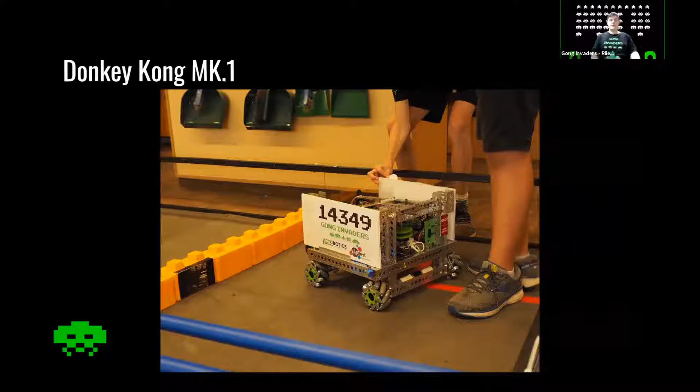Our FTC rookie season was Skystone, but we have participated in 2 seasons of FLL as a team and even more as separate teams. Our robot, named Donkey Kong, was our first robot using mecanum wheels. We have a 4-wheel mecanum drive which allows driving in all directions.

Our arm developed over the season and we finished with a continuous lifter, although this was never used in the competition as it was our project for World Championships. Our arm during the competition was an angle lifter with cascading rail extension.

For our regional competition, we arrived on day 1 with a great robot and a confident attitude. We tested on the practice field and everything worked well. We got to our first game and the autonomous worked perfectly. When we went into teleop, however, the robot stopped moving and we couldn't do anything.

After the game, we tried to test the programming at the practice field and it worked fine. When we had our next game, the same issue happened. Perfect auto, no teleop. We then started to investigate our code more deeply.

We couldn't find any issues, so we asked some other teams. No one could figure out why the robot wasn't working, even after we had talked to multiple different teams. That day, in all 4 of our matches, our auto worked, but our teleop completely failed. We even won one of these games as our autonomous was high scoring, but we still felt very demoralized as our robot wasn't working the way we expected it to.

During this day, we approached many teams and made new connections, but we were all disappointed in our results. That night, we rewrote our code completely, and in the morning, we were lucky enough to be given a fill-in position in a game with only 3 players, which gave us a chance to test our code in match conditions.

The countdown to teleop was extremely intense, but when the timer ticked over, our robot had moved, and we had our code working. Our team, family, and the whole crowd cheered, as everyone knew our struggles from the previous day. We were filled with joy and were ready for the rest of the comp.

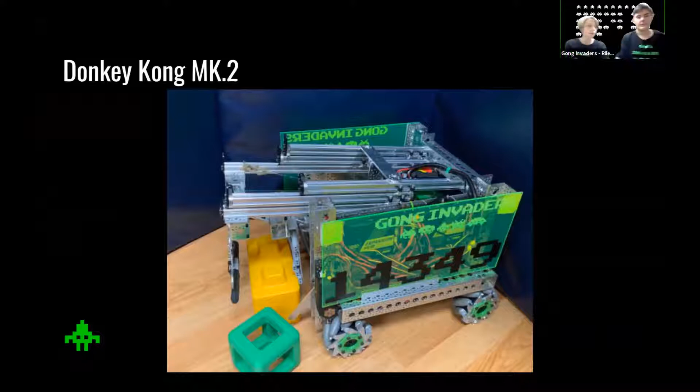After a strange experience at regionals, we were ready to come back strong and perform very well. Before we competed, we talked to another team to get help with our code, to see if it was working properly. The mentor came and gave us some tips, which addressed the same issue we had at regionals. We were very thankful for this, and glad to finally have our problem solved.

After this, we continued the competition with our heads held high, and our robot performed extremely well. We won all 4 of the games that day. This placed us in first place for the whole day, since we scored high points and played against other strong teams, which increased our matchmaking rank.

The second day went similarly, and we won our first game. Unfortunately, our alliance partner for the last game disconnected at the very beginning of the match, so we were forced to play the game alone. We still scored very well and lost by only 1 point, which pushed us down to 3rd place.

In the alliance selection, we chose two teams who paired very well together, but we unfortunately lost in the semifinals. In the award ceremony, we were very happy to receive second place in the Inspire Award, which gave us an invitation to compete at the World Championships. Unfortunately, we were unable to attend due to the current world pandemic. We were also awarded the Control Award and nominated for 2 other awards.

What we hope people learn from this is that it's okay to ask for help. Teams may be embarrassed or afraid to ask better teams for help, but the FTC community will always be happy to help with problems. Asking for help from experienced teams will also allow new teams to learn tips they can use in following seasons. Thank you for listening, and we hope you learned something.

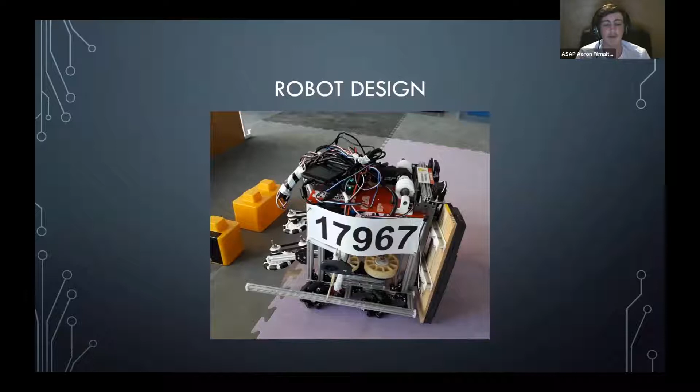Now I'm going to explain a little bit about our robot. As you can see here, this is our robot. It works off a 4-wheel mecanum drive system, and we have some metal reinforcements on the side so the wheels don't get damaged.

You can see here is our robot's intake. Our robot's design was to intake the blocks by sucking them up, as you can see by the Omni wheels on the right-hand side, and they were then stored in the middle of our robot, where we could then spit them out onto the game field.

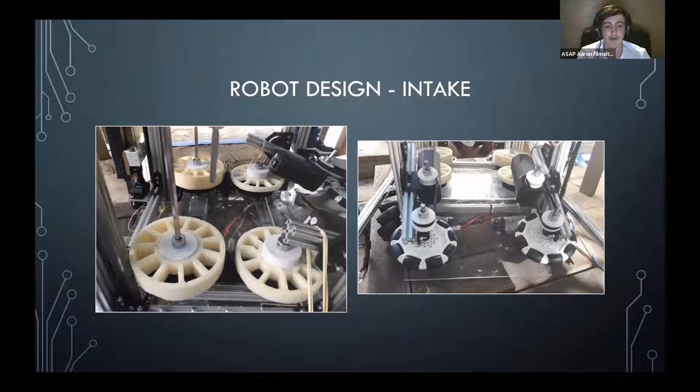We also wanted to use a mecanum-type wheel, but in South Africa we couldn't actually order those because they aren't delivered there. So to get around this problem, we simply molded our own wheels from polyurethane.

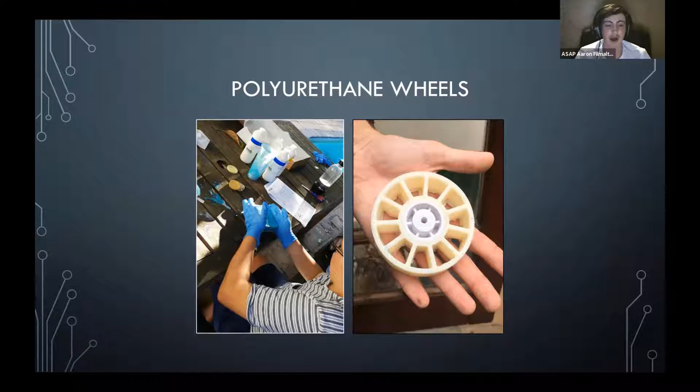This is what we used in the middle, which would grip the bricks, and at the same time it would be able to grip bricks of different sizes.

On the left hand side you can see our grabbing mechanism. The way it works is we had some window insulation that we used to grip the bricks, and we used a method of inverse stacking. We used inverse stacking because then we didn't have to buy linear slides to lift our bricks all the way up. But we found that when it got to 2 or more bricks, they became too heavy, which caused the bricks to start sliding down.

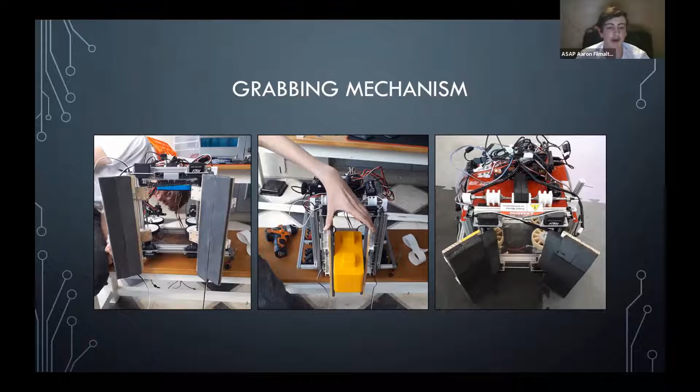So in our final iteration, as you can see on the right, we have some very high friction coefficient pads that we put on, and these are designed to grip the bricks very well. When you put a brick on, you could even try pulling it out and it would move the whole robot instead of pulling the brick out.

For our lifting mechanism, we looked online and saw there were Rev linear slides, but they were expensive to ship to our country, so we thought, what are the alternatives? The alternative we came up with was using drawer slides, like in your kitchen. As you can see on the left, we have 2 drawer slides connected to Rev extrusion, and we used these to lift our robot.

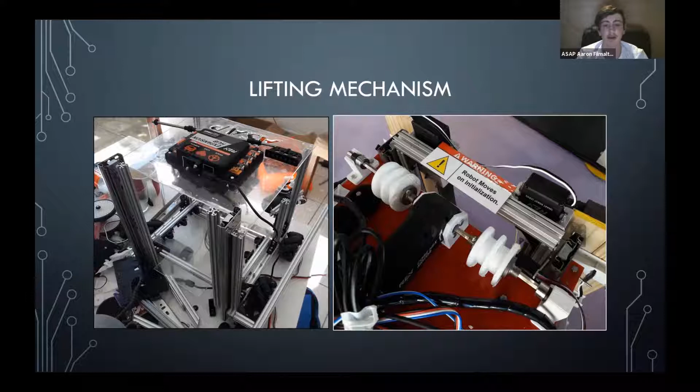Since we were using inverse stacking, we didn't need to lift it more than 1 height. As you can see on the right, we had 2 spools connected via fishing line to the bottom of our lifting mechanism. This lifted it up so we could stack a brick, then we lowered it again, grabbed more bricks, and lifted the entire stack up, so we could stack to a technically infinite height. However, gravity and physics stop that from happening.

For our programming, we have 2 different modes: driver mode and autonomous mode. For driver mode, mainly because of time constraints, we chose a philosophy of simplicity over complexity, since we only had a month for everything, from designing the robot to building, programming, and troubleshooting. Our idea was to have intuitive designs where simple button presses do simple actions, like turning the motor on and off.

We use a simple driving system with mecanum wheels, as you can see in the flowchart on the right. It's a standard one, probably the same system all of you who've used mecanum wheels have used.

The one feature that differentiated us from other teams was what we call precision mode, where pressing the trigger button reduces motor power to a maximum of 25%. This helps us move the robot more precisely without accidentally knocking over the tower. It worked so well that we made precision mode the default, with a button press unlocking full speed for driving fast.

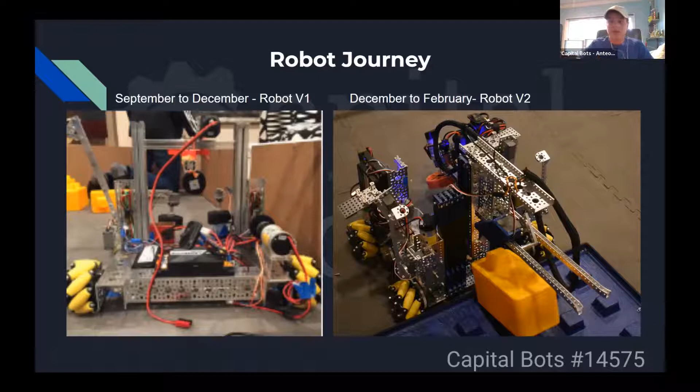We used a long robotics lift mechanism, allowing us to stack up to 12 blocks. We also had dual arm platform pullers, as well as two autonomous arms used to pick up and transfer blocks. We also used a common intake wheel mechanism that basically pulled the block onto a platform before being grabbed by our claw.

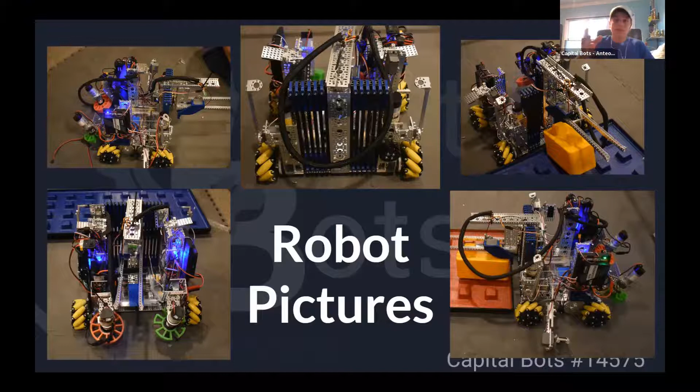Here are some pictures of the robot where you can see a lot of its functions. One thing we utilized in our second robot was a front intake and back delivery system. Our claw was able to basically flip from the front to the back of the robot, and this allowed us to be a lot faster while stacking blocks.

So these are a summary of the outreach events we conducted last year. One of our team members' siblings went to Haycock Elementary School, so they had a STEM night similar to a science fair that we went to. We use our 3D printer a lot for our team, printing a lot of CAD designed parts.

So we actually set that up at the booth and showed it. It was like a demo of a toy being built in the 3D printer, and we were explaining the process. And then we explained a little bit about our team and our journey through FTC with the trifold, and we raised some awareness among other people who were interested in joining FIRST.

And then another outreach event we held last year was an introduction to FTC event. Most people didn't really know about FTC at this event, and something we do commonly throughout our events over the years is bring our robot and let kids control it on the ground, so they can see how the mechanism and wheels move.

Especially for kids who already do FLL, they are pretty intrigued by this since it's quite different from the robots they build. And of course, we also demoed some of our 3D printed items and talked about our CAD process.

And then the awards we won last year: we were nominated for the Think Award, and then we won the Control Award at one of our qualifiers.

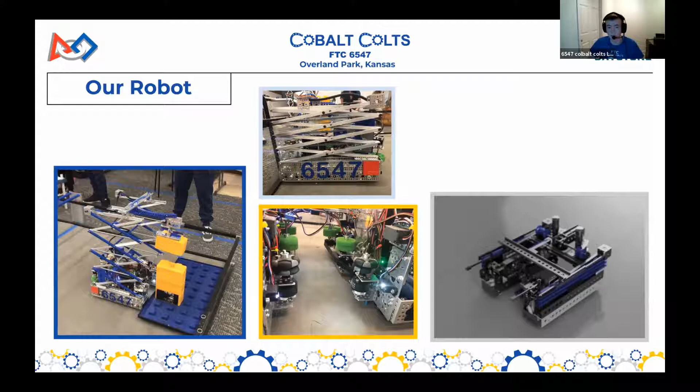Now on to how to pick your unique alliance partner. What we like to do is consider what most teams are going to do and then strategize in a way that complements the most popular designs. In other words, we don't want to find our ideal alliance partner, we want to be that ideal alliance partner, so we have that to fall back on.

We like to establish an effective and organized scouting system for our competitions. We use Google Slides with a form that goes straight into Excel so that we can ask questions that pertain to our strategy, so we can know what teams would work well with us, as well as other teams know what to look for when they're looking for an alliance partner from us.

Now switching to our community outreach efforts from Skystone, here are a few of our large projects that helped us spread FIRST and STEM to our community.

Firstly, we partnered with a local nonprofit called Walkin' and Rollin' to design a wheelchair Halloween costume for a local girl named Macy who has Rett syndrome.

We also started a 501c3 nonprofit titled Kansas STEM United with the goal of seeing STEM and FIRST reach the state of Kansas through funding.

And we also partnered with goBILDA to design a simple drivetrain, along with an instruction manual that new rookie teams can reference to build a simple starter drivetrain.

And then also during COVID, during the quarantine time, we have fabricated over 1,000 face shields and have distributed those to our local community and abroad. We've also filmed some public service announcements relating to COVID and how to protect yourself and properly socially distance. Those are available on the Kansas STEM United YouTube channel.

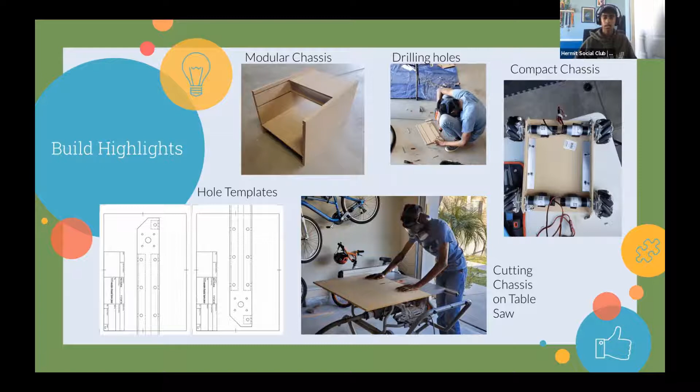This year, we also introduced many new members because the sustainability of our team is very important to us. A lot of our team members will be gone from the team in 2 years, and this is why we reached out to new members this year.

In the 2019 to 2020 season, we integrated 3 new members from FLL Team 1641, Epic Space Nerds, and 1 new member from a local high school. While their experience in FLL certainly aided them in a smooth integration into FTC, we focused this year on making them able to solve complex problems with simple solutions.

Now I'd like to move on to our programming highlights for this season, starting off with our use of multi-threading. While trying to work with more computationally intensive and complex motions, we ran into problems with managing the proper timing of everything that was going on.

We also made use of key point vision adjustments. During the season, we had significant issues with the reliable use of Vuforia to track the location of our robot. The camera is often too far away from the vision targets to give a clear and actionable image, and the robot's movement made it difficult to do accurate tracking. We found that we could make best use of vision as a supplement to encoder dead reckoning instead of as a replacement. By only tracking at certain key points on the field, we allow the robot to correct itself before more precise movements, such as picking up and placing blocks, reducing accumulated inaccuracies from drift inherent in our mecanum drivetrain.

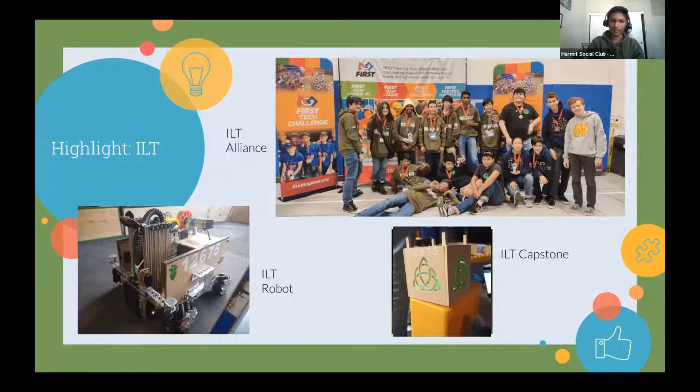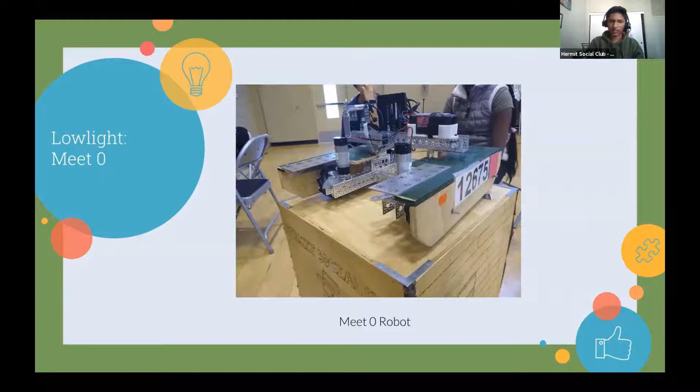I'd like to thank everyone for listening.

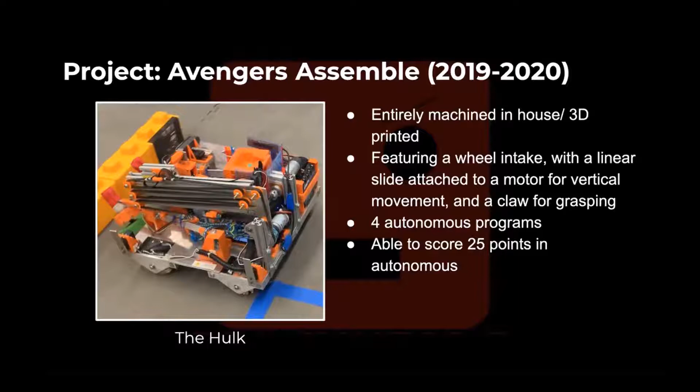This season, one major thing that was really important to us was our business aspect, and during this season we were able to get 2 new sponsors. One of our first sponsors we were able to get was Ucode, a local coding academy store in our community. They are really STEM oriented and teach coding to young children from elementary school to middle school. One of our members who's in FRC volunteers there and helps out, helping us keep a close relationship between our team and their business.

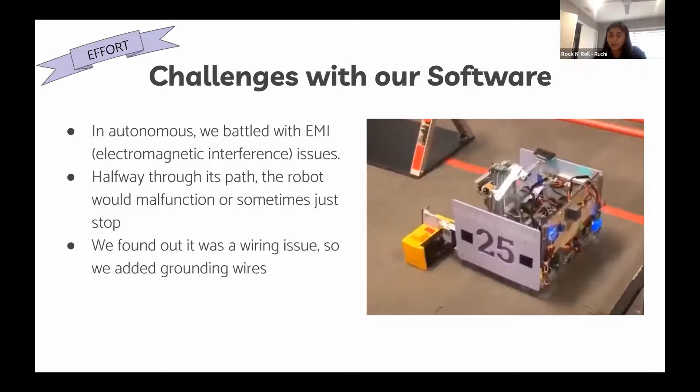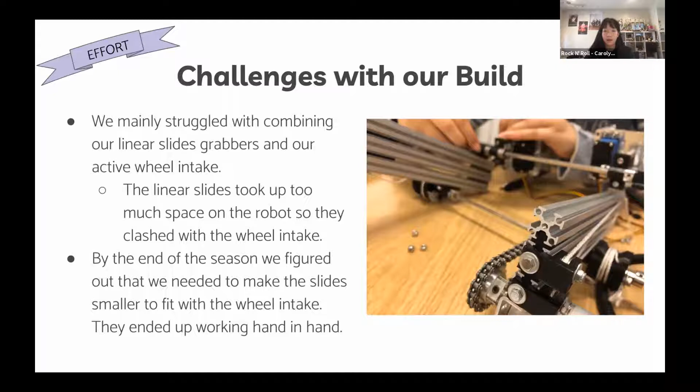Some challenges we had with our build were mostly with the linear slides and the wheel intake. Because the slides took up so much space, there was no room on our robot for the wheel intake to work in tandem with the slides. With testing, we figured out a way to reduce the size of the slides and implement the wheel intake.

Something really crucial to our team was how to handle time management since all of our members attended different schools. We had good time management by planning when and how we would meet so we could effectively work together on our robot.

Beans and Bombs is a joint overnight camp in which we introduced the rookies to the overall gist of FTC, and it included a 1-day robot competition with awards. Our team valued the idea of bonding because it helped us get to know each other and find ways to work together efficiently.

In the aspect of gracious professionalism and helping others, during the season we helped one of our alliance partners, Robo Falcons, by lending them a battery so they could use it as a deadweight on the robot. During our matches with them, we scored 55 points and won the match. And because it was their first league meet, we helped them feel welcomed.

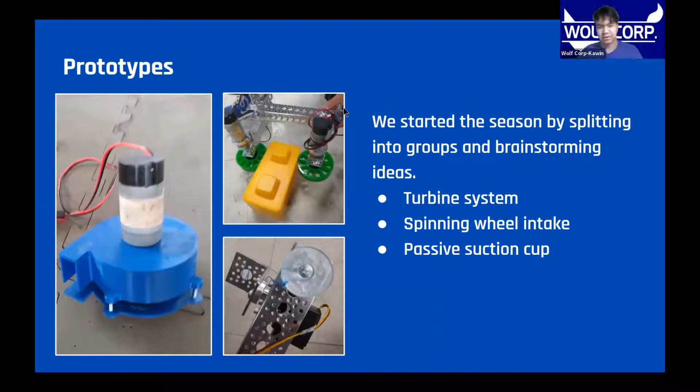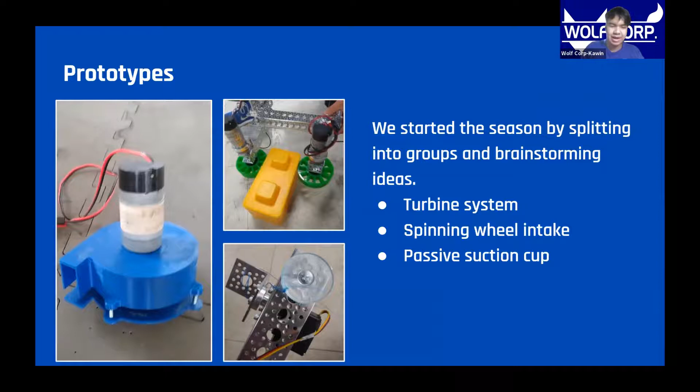We started the season by splitting into groups and brainstorming ideas, several of which included a turbine system that spins to create a suction effect, a spinning wheel intake to reel stones in, and a passive suction cup. After much debate, we settled with a simple claw that rotates 180 degrees for both the intake and scoring mechanism.

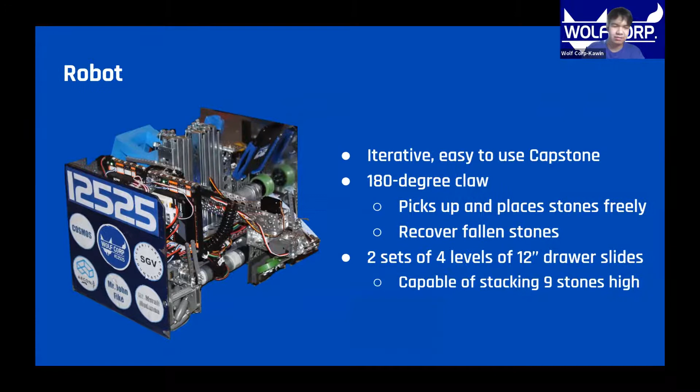It can turn to align itself with the stones and foundation and is attached to 2 sets of 4-level 12-inch drawer slides, capable of reaching up to 9 stones high. The most innovative part of our robot is its ability to recover fallen stones.

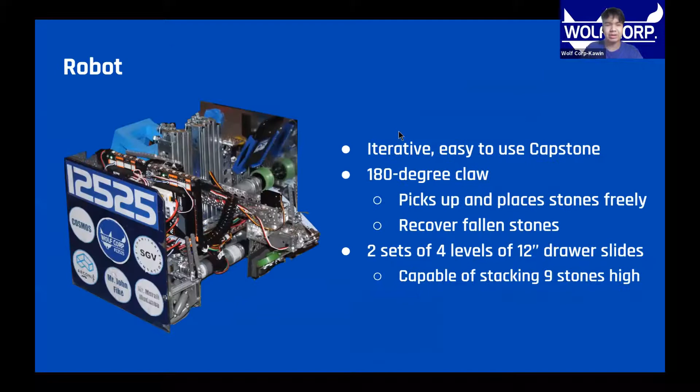When programming the robot, we ensured that all autonomous programs maintain an accuracy of 90%. We implemented the phone camera running in TensorFlow to locate the Skystones and used gyro to avoid collisions. Moreover, our teleop programs include driver assist functions such as an irreversible spool, a snapping claw, LED warning lights, and a quadratic drivetrain.

Last season, we tried something new in regards to the engineering notebook. In addition to our usual binder of information, we created a separate handwritten notebook to document the entire life of our robot, from brainstorming, prototyping, and making small modifications until we reached the final product. We also divided the binder into sections, noting down sponsors, outreaches, and expert meetings to ensure that we share each and every adventure we've experienced throughout the season.

We also participated in countless outreach events, including several science fairs, community activities, and robotics classes at local libraries. Our greatest achievement was connecting with 17 other robotics teams to host a robot expo at our school. We also partnered up with a nonprofit organization to host STEM activities once a month and gave back to our community by participating in community events and raising money for charities.

This past season, we've also connected with more than 8 experts to gain knowledge, feedback, and advice for our robot, programming, and team overall. We've met with a physics professor from Caltech, consulted with engineers from JPL and Boeing, toured a makerspace, and talked with a software developer from a local company.